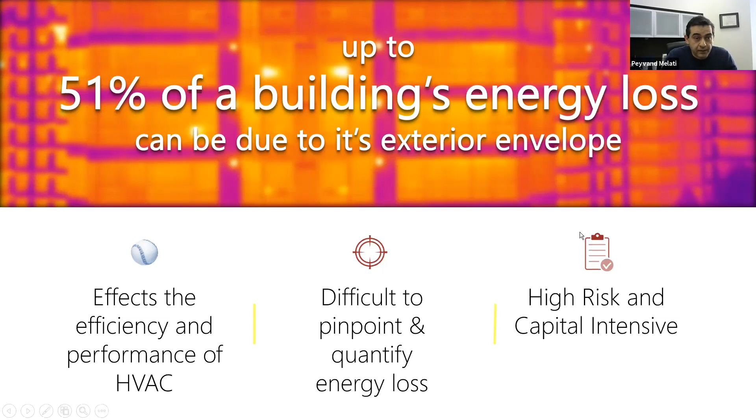Now, with the new greening initiatives from the Government of Canada, it's quite important, as Thierry explained, to have a holistic view of retrofit projects across the building.

In other words, if we fix the HVAC emissions or lighting energy in a building without considering the building envelope, and then go after the building envelope afterward, you can end up with an oversized or undersized HVAC system that will jeopardize the entire energy saving or GHG reduction program. So having a holistic view is quite important.

We're also going to talk about how we can have targeted retrofit projects. I have 4 case studies today that I'll share with you, showing how the QEA Tech tool could help stakeholders across the vast portfolio of buildings that the Government of Canada has, to achieve their targets for reduction of carbon and GHG.

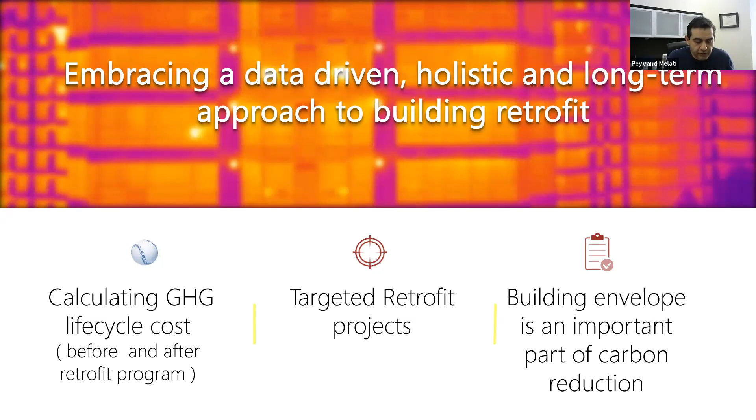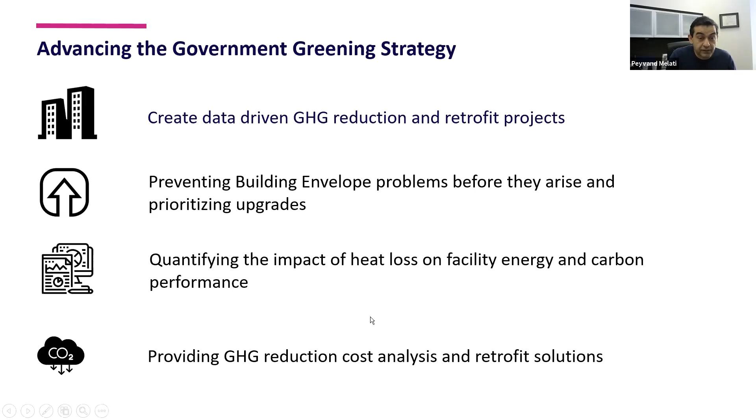So I'm going to briefly explain the technology and then jump into the case studies, and hopefully we'll have some Q&A after. If you need more information about the technology, I'd be happy to explain. How we do it is very cool.

We fly a drone around the building. The drone flies by itself - it's an autonomous flight. By law, we need to have our pilots in line of sight of our drones. So before we come to a property, we have a pre-planned flight for our drones that will fly around the building and capture the data points we want.

These data points are pre-planned: high resolution visual images and infrared images. These hundreds, sometimes thousands, of images we take from the building go through an image processing software. They get ranked and quantified as far as where the problematic area is and how bad it is.

At the end, we provide asset managers and property managers with a final report that has an executive summary of the health of the building envelope, and very granular quantification of what kind of problems we've seen and how much emission came from each section of the building. We separate the heating and cooling elements so you can clearly go after - since heating usually uses natural gas - your carbon reduction targets and so on.

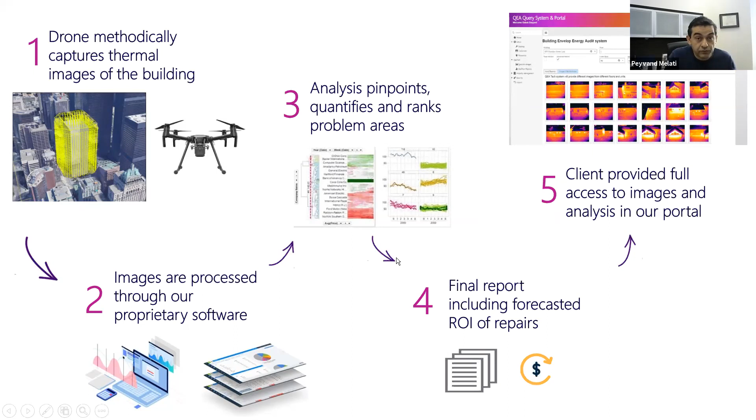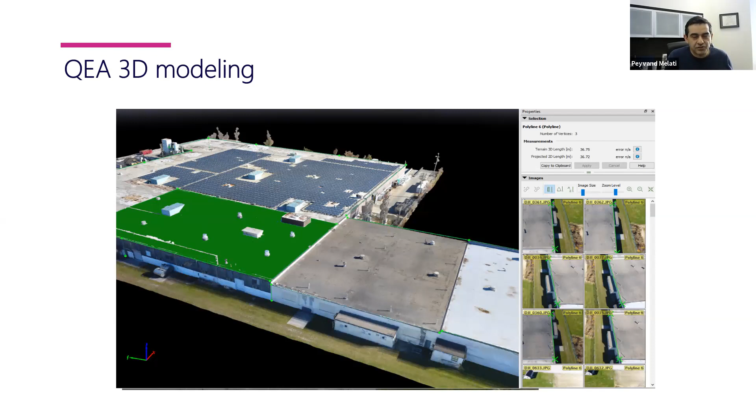As far as the technology, the first step for us is to create a complete 3D model of the building. This 3D model is measurable - we can measure every corner of the building within a few centimeters. The reason is we need to measure the area of the roof, windows, doors, and different building elements, and calculate the emission and energy loss from each of these elements separately.

I've talked about the pre-planned flight. This is just a picture to show you, in a complex building like this - one of our case studies today - how the drone flies. These yellow lines are the path of the drone flying up and down, and the points are where we capture the data.

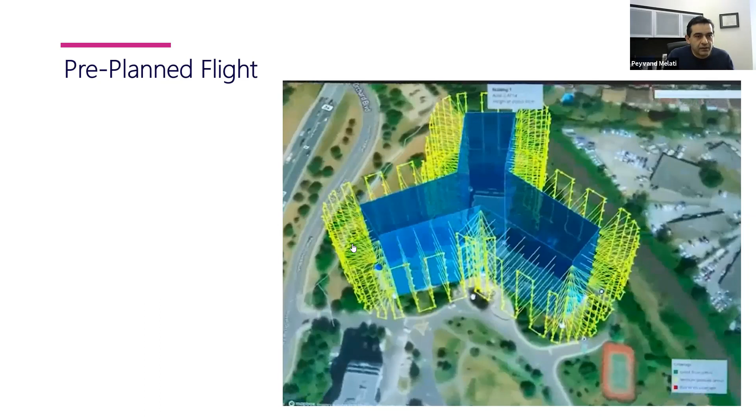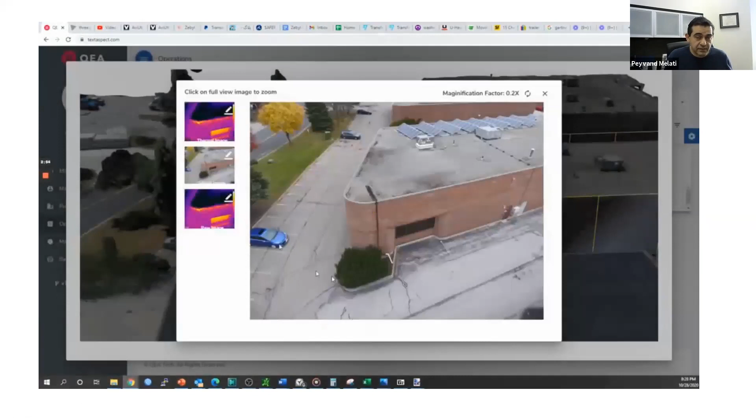And then I mentioned that at the end of the operation, we provide all of the data on a web portal. It's very important for people that have multiple buildings in a portfolio. And you could see every corner of the building in a very interactive way on a 3D model of the building: where the problematic areas are, what the visual images were, and also capture the energy loss and the emissions from each section of the building.

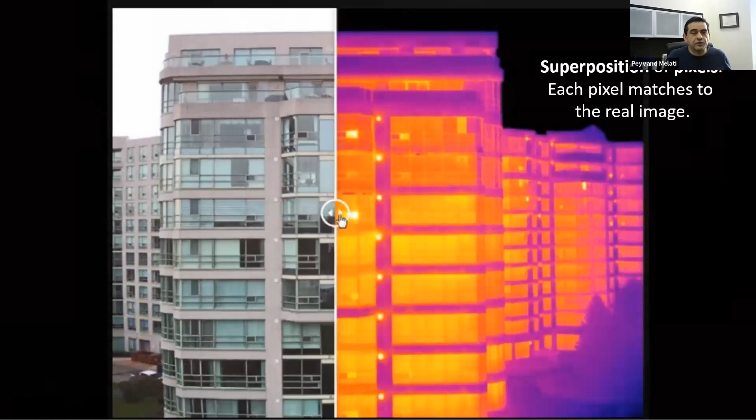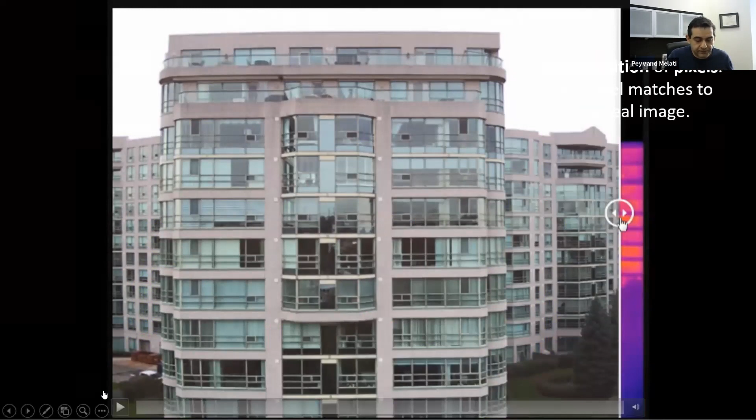The technology works, as I mentioned, based on high resolution visual imagery and also infrared imagery. And we have a very cool AI software in the background that recognizes different building elements and also calculates the energy loss from different sections. Now I'm going to skip my other explanation about the technology, and I want to jump into our case studies.

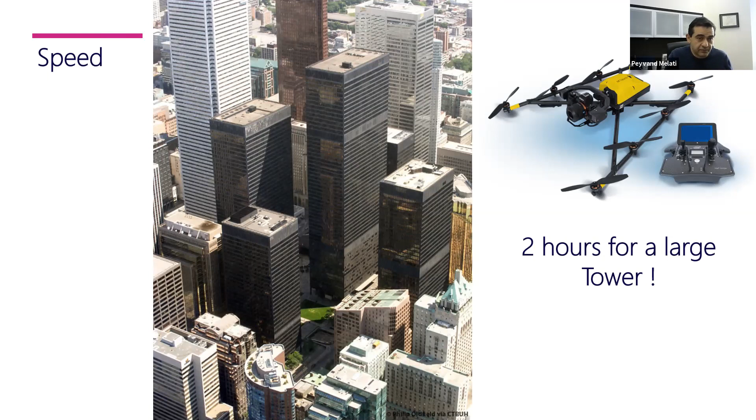One thing that I want to mention before I go to the case studies: our technology is completely non-intrusive, and we had a big boost during COVID because it's very hard to get into buildings. So all the operation that we do is from the outside. And also the speed is quite important. For a very large tower, let's say in downtown Toronto, it only takes us 2 hours to do the entire operation and collect the data. That doesn't mean that the report is ready. It takes a bit more time, but this is usually what the property managers are looking for as far as the operation. So let's dive into our first case study.

This is a 12-story building, a mix of concrete and also glass and IG walls. We did the entire energy audit of this building. The property manager had a budget of $1 million to go through a retrofit and recladding of the facade of the building. The target was obviously to fix the structural problems on the building, and also energy and GHG reduction. We did the entire audit of the building envelope, and we measured that the actual energy loss from the envelope is about 2,600 megawatt hours per year.

And we did another study: if everything in this building was according to the 2017 building code, what would be the energy loss? That came to 1,600 megawatt hours. So the opportunity, or negawatt as we call it, the net difference is about 1,000 megawatt hours, which is a mixture of natural gas and electricity. Based on the cost for this building, which was about 9 cents per kilowatt hour, the opportunity from a financial point of view is $92,000. So this is how we can provide them with this opportunity, and we can also zoom in granularly, find the problems in different sections and give them more granular targets.

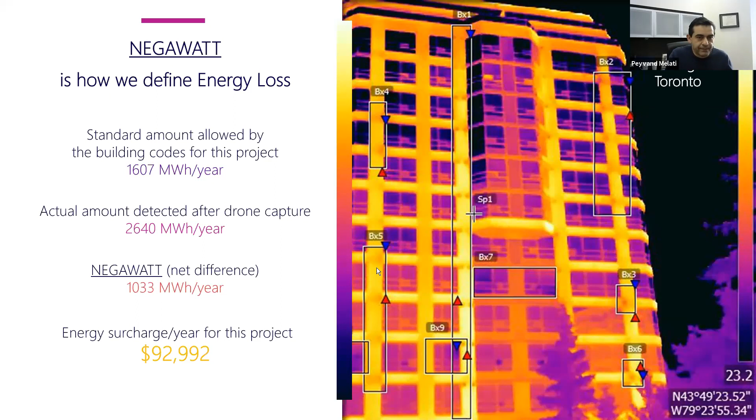Here you can see on the same building, the developer didn't put any insulation in these walls. And this is where our software will capture different sections of that. And now we want to give a tool. Imagine a portfolio manager that has hundreds of these buildings, and they want to know where to put the budget as far as reduction of emissions and energy saving. So we can even zoom in and say from this 10 or 11 square meters, they're losing about 170 watts per meter. Does it make sense for them to allocate the budget, and what kind of return are they getting from carbon reduction and energy saving?

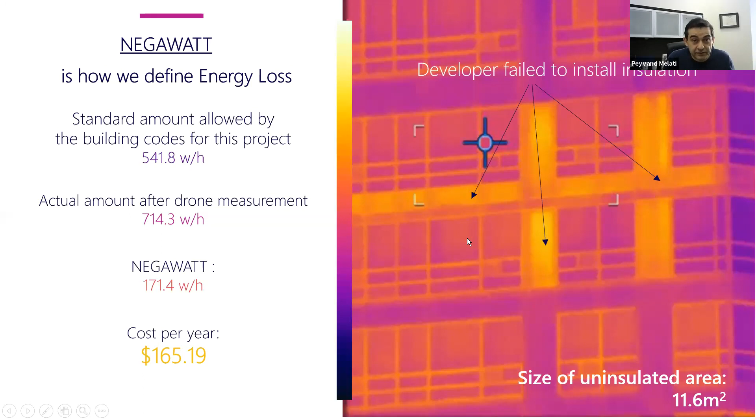The next case study that I want to go through is a large complex. It's a university, an educational facility with multiple buildings, 400,000 square feet. They have a specific mandate as far as carbon reduction and achieving net zero. The building is a mix of concrete and prefab. So we did the entire building. Again, this operation for us was about 4 hours, and it took us about 2 to 3 weeks to analyze the data for these multiple buildings. And we had very interesting findings in different sections. These buildings were built in different eras, some in the 80s, some of them newer, and we could provide them with very good visibility over their entire portfolio.

This was just one of their campuses. We've done multiple campuses for them, and provided them with the opportunity: the preventable energy loss is about 4,000 megawatt hours and 2,800 metric tons. Now, based on what Thierry showed us on the government website, you can do a calculation, and the building can take on much longer payback projects, considering the cost of carbon as well.

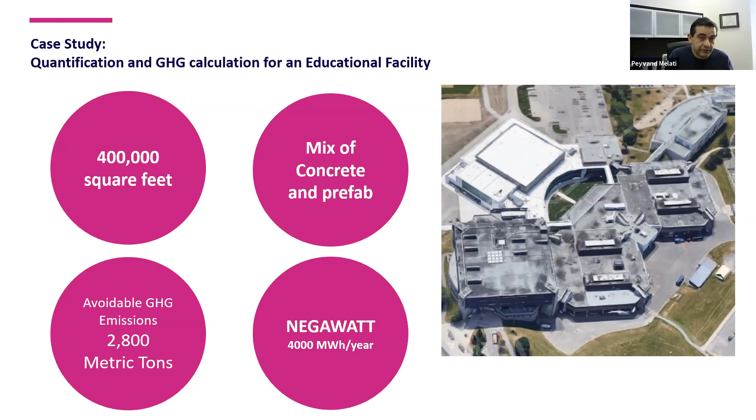What were our findings? Here you can see some examples of energy loss, which you can't see with the naked eye. We can see what we call energy gushers or energy channels that go through the different levels of this building. We can find inadequate insulation in a section of the building that translates into energy loss. And sometimes the energy loss could be even more important, because when you have energy loss, there's a possibility of moisture penetration. And this was a big concern for the asset manager, that a big amount of water basically penetrates this section of the building.

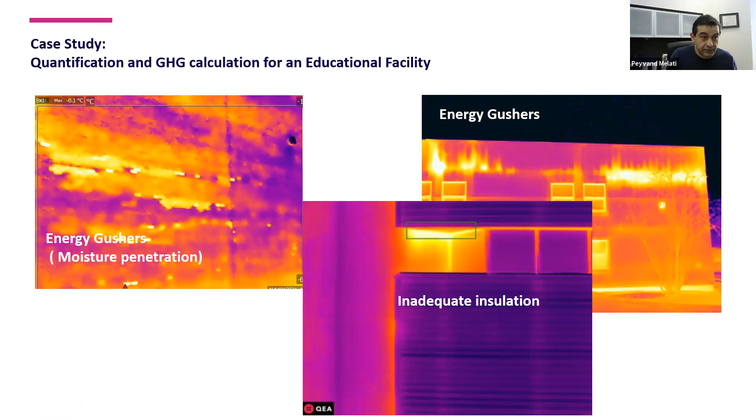So we've calculated what the total energy loss is, what the opportunity is. To our surprise, this building built in the 70s was performing very well. What I want to say is it's not always the age of the building that dictates the energy behavior and also emission behavior of the building envelope. It might be a building from a long time ago, but we found some of them behaving thermally very nicely. In this case, the avoidable energy emission for this 1.1 million square foot was 2150 metric tons.

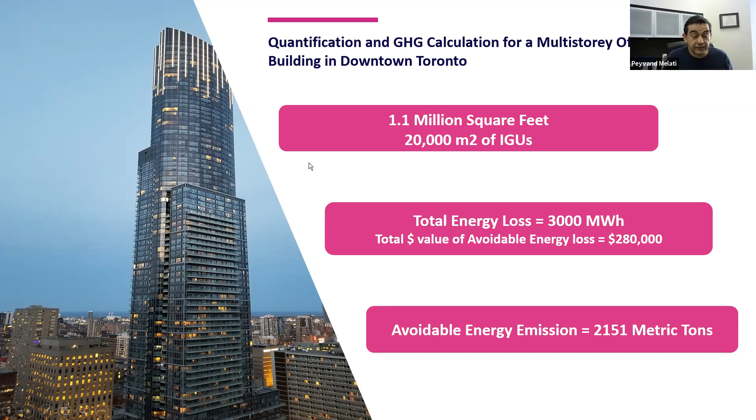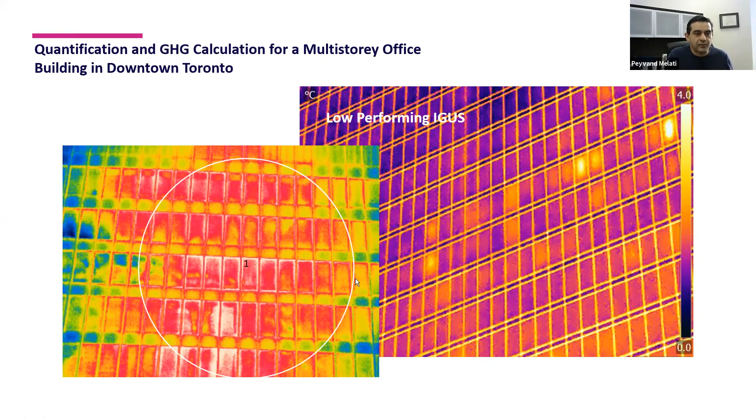Now, some of our findings: usually you find in these office towers and glass towers low performing IGUs. You can see in this building that the insulating gas between the layers of the windows is gone, and you can even see which one is gone, or the low performing IGUs on another section of the building where the insulation around the windows is gone. And this gives a very good idea of how they can attack this, how they can allocate their scarce resource, which is budget, to targeted energy reduction or carbon reduction projects.

Next case study is a 2 million square foot industrial building. This is a production facility, and usually in a production facility, the building is the last thing that the property manager considers. But we showed them that there is a big opportunity here in fixing the building envelope and also reduction of carbon. The building is a mix of bricks, concrete, and prefab, and some IGUs, windows, and garage doors. We showed that the avoidable energy loss, or the negawatt in this case, is about 424 megawatt hours per year, and 300 metric tons of GHG per year.

So that's the opportunity. Now I'll share with you some of our findings, which are quite interesting. The same suspects. You have energy loss in these garage doors and the energy gushers that we usually have. Here, in the boiler room of the production facility, we find leakage underneath that could be quite important for them. Lots of energy was lost through that section. And also the walls, we find areas in the walls that didn't have adequate insulation.

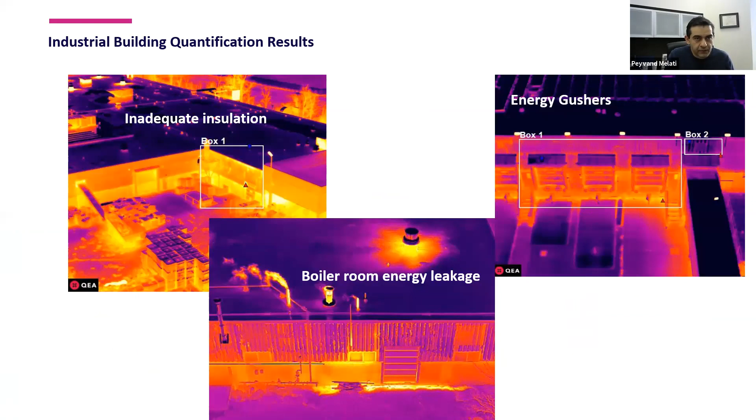Now I want to give you an example of what we talked about, targeted retrofit and payback calculation. Generally, the reason these retrofit programs were neglected before is we were always talking about the payback time and considered the payback time on the building envelope very long. This is actually part of a federal building, and we anonymized the data for privacy. Here, just two building elements, the walls and the windows and doors, with approximately the same cost of fix, about 100K. One is applying insulation in a section of wall, and the other is changing windows and doors on a section of the same building. You can see that the payback time is significantly different. So we want to make sure that you have this tool to make data-driven decisions on that.

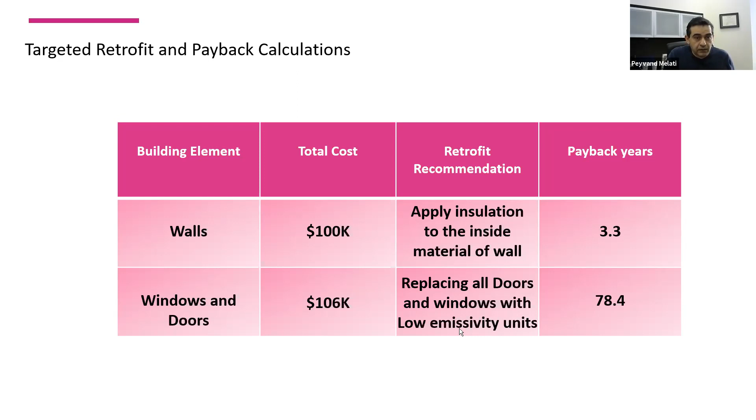And then what Thierry was explaining, and I think is quite important, is in our payback time, we have to consider the non-energy benefits, like carbon reduction, and also the avoided replacement cost in how we do our calculations.

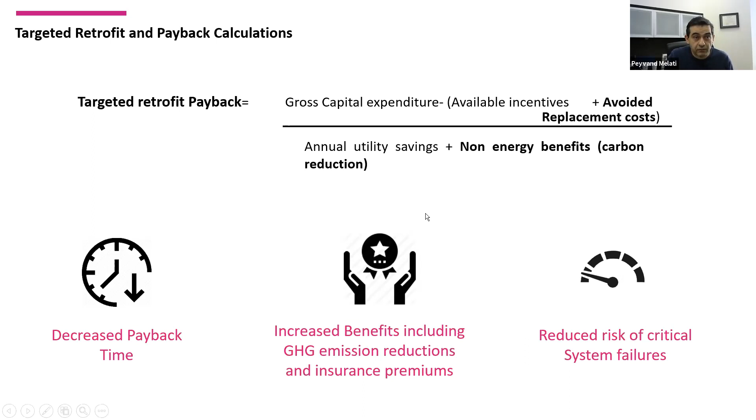Another section which is quite important is about new builds and also the retrofit program. So we usually get involved in commissioning and after retrofit assessments. In this case, you can see a retrofitted building belonging to a local government here in Ontario where we found quite a lot of problems after the retrofit and a lot of energy loss that was not calculated in the target that they had for net zero.

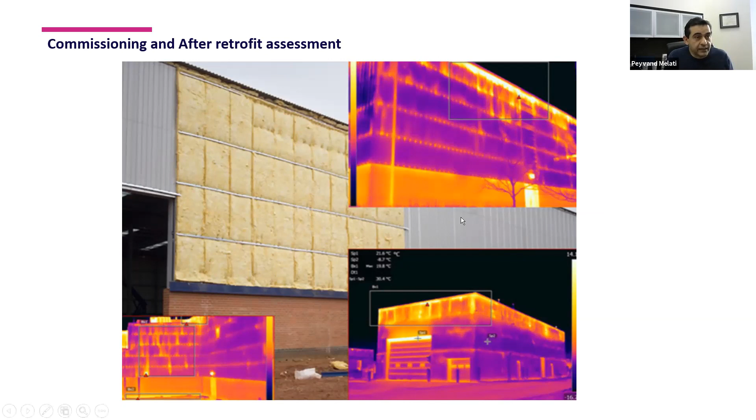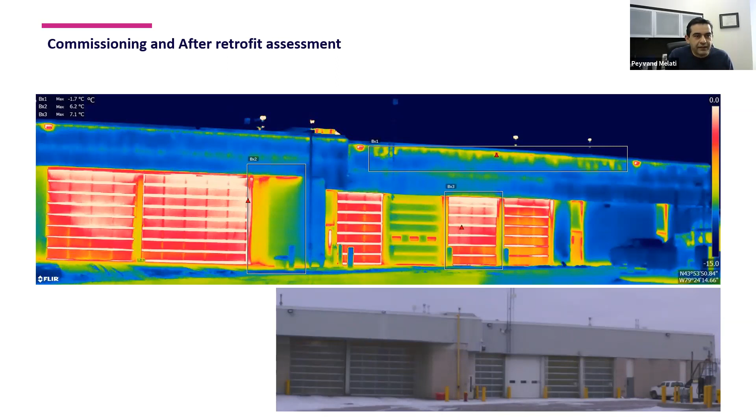And the last slide that we have is the same commissioning. One government section decided to change all of their garage doors to this acrylic type of garage door, and we found that from an energy point of view, these new doors are much worse than the old doors, and this could be a case of not achieving your target, although you're spending the money on changing the building elements. And that concludes my presentation.